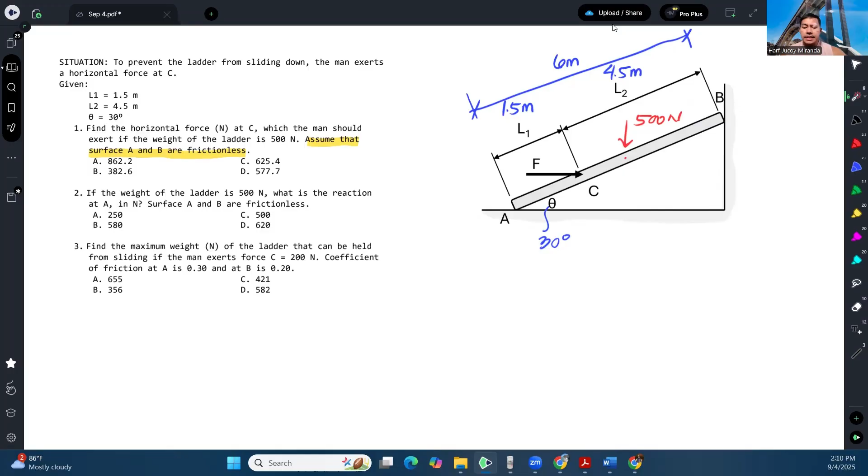And also, according to item 1, assume that surface A and B are frictionless. So meaning this is frictionless and also this one. So let's put reactions on the ladder. Basically, let's draw the free body diagram of the ladder.

Okay, so we will have a normal reaction here, and we will have another normal reaction here. Reminder, when we say normal reaction, from the word normal, it means it is perpendicular to the surface of contact. So we know that the reaction here would be vertical because the surface of contact is horizontal. Here, we know the normal force is horizontal because the surface of contact is vertical. It's always perpendicular to that surface. So that's it, those are all the forces acting on the ladder.

So let's solve for what's needed. We are asked to solve for the horizontal force F. So to solve for F, let me first put in the measurements. First of all, this distance can be calculated. And that distance is basically 1.5 sine of the given angle.

Why? Because if you look at this triangle, it turns out this is 30 degrees and this is 1.5. So it turns out the 1.5 is the hypotenuse. That's why this is 1.5 sine of 30 degrees.

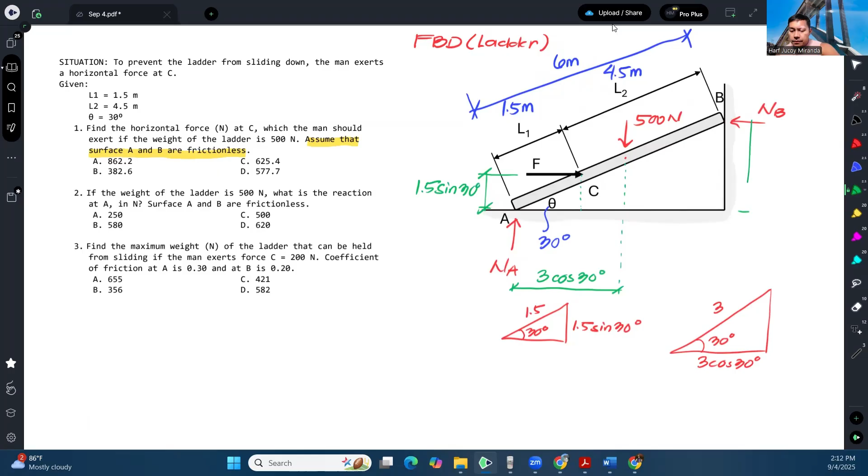And then lastly, this can be defined as 6 meters times sine of 30. So once again, if we consider this triangle, it's obvious, this is the 6, so this is the 30, therefore this is opposite, so it's 6 sine 30.

Okay, so the reason I did that is because I want to take the summation of moment at A, in order to get or create an equation. We could take moments anywhere, but preferably at A or B since those forces are also unknown.

So let me take the summation of moment about point A, assuming counterclockwise is positive. Starting off with F, the moment arm is 1.5 sine of 30, and the rotation is clockwise. And then we have the weight, whose rotation is also clockwise. Its moment arm is this.

Okay, and lastly, the one that rotates there is the normal reaction at B, whose rotation is counterclockwise. So plus NB times 6 sine of 30, and that is all equal to 0. For now, that is our equation.

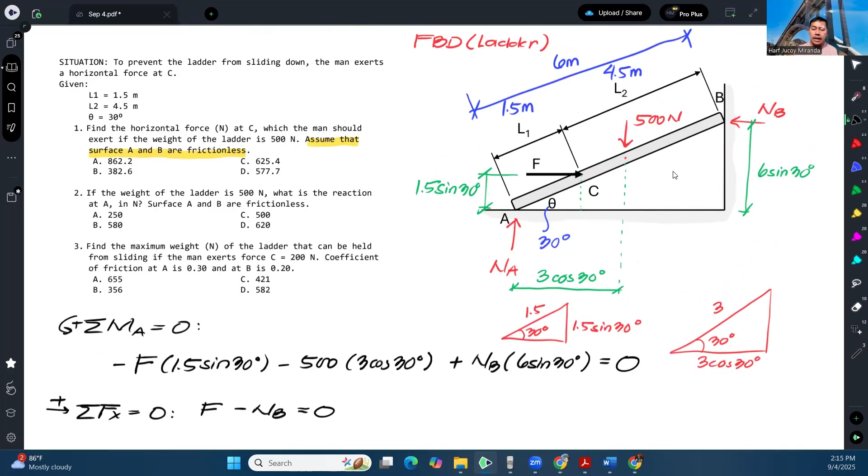Okay, so I'll assume to the right is positive. So we have F to the right and then NB to the left. Those are the only forces acting horizontally, there are no others. So therefore, we can say that NB is actually equal to F, and with that, we can substitute NB here.

So pwede natin to palitan ng F. And from there, we can solve for F. Okay, so solving for F.

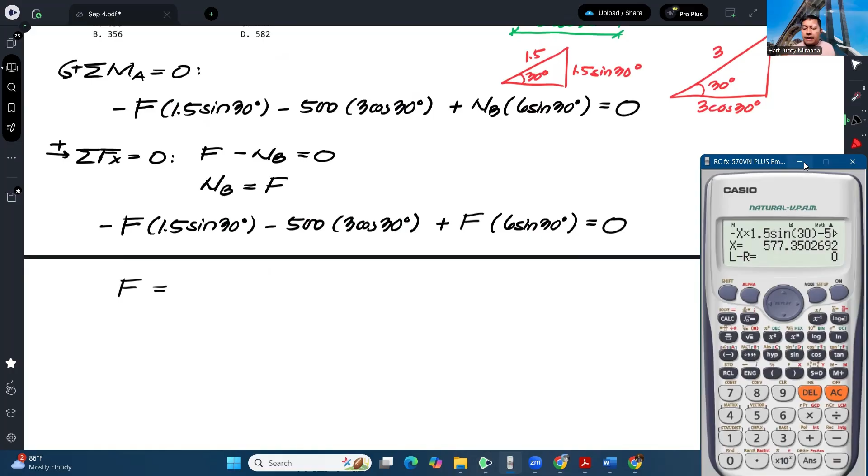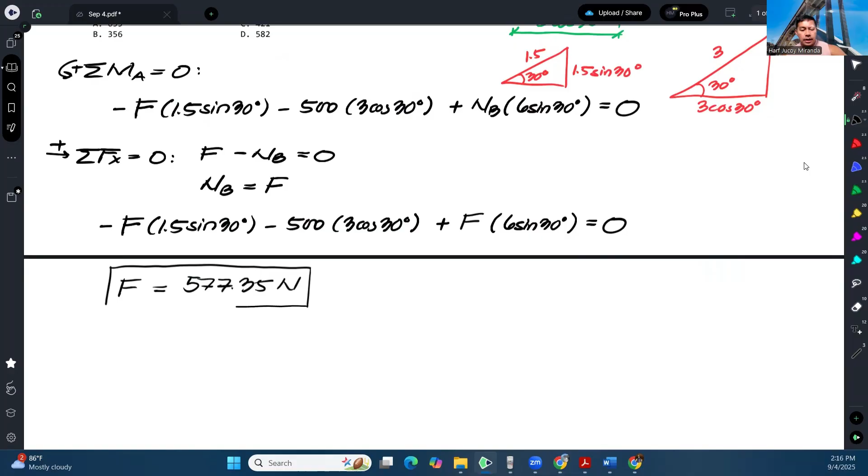So that gives us 577.35 newtons. So that is the required force that needs to be exerted to the ladder to maintain equilibrium. So our answer here would be letter D.

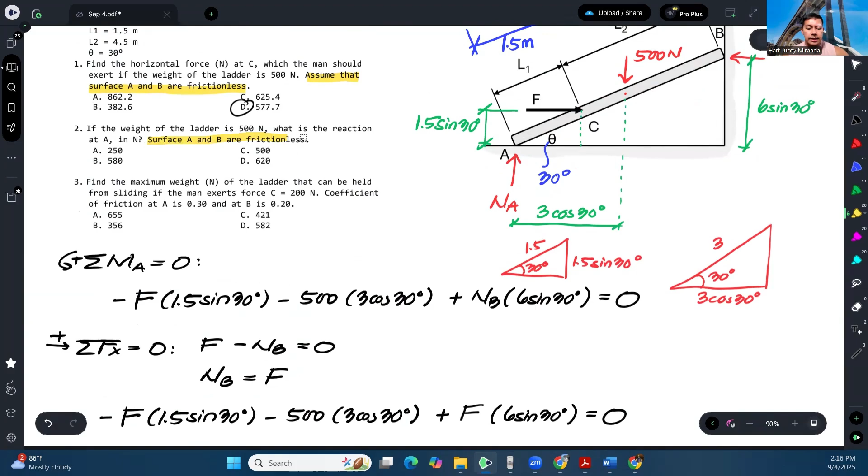Next, if the weight of the ladder is 500 newtons, what is the reaction at A? And again, surfaces A and B are frictionless. So ito pa rin yung free body diagram natin. So to solve for NA, basically, gagawin mo lang summation of forces Y and kitang-kita kagad.

This for number 1, this for number 2. If you take summation of forces Y equal to 0, assuming upward positive, kitang-kita kagad na NA is equal to 500. Kasi wala namang ibang force acting on the Y.

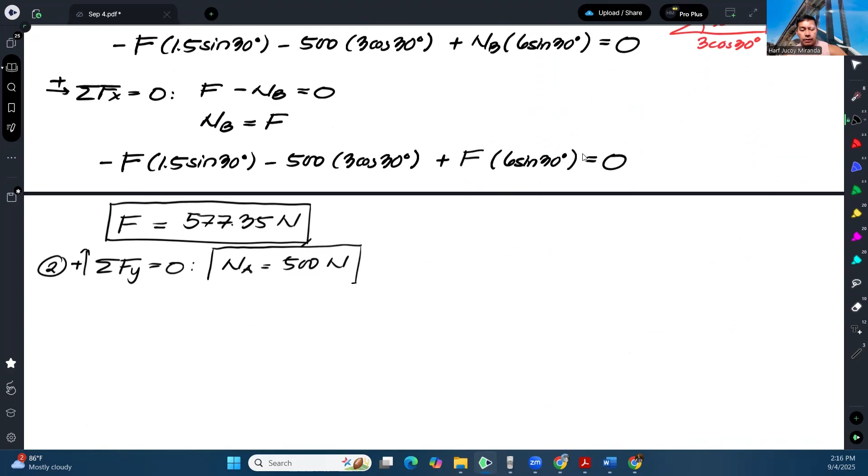So therefore, our answer here would be letter C.

Okay, lastly, number 3, find the maximum weight of the ladder that can be held from sliding if the man exerts a force of 200 newtons and the coefficient of friction at A is 0.3 and at B is 0.2. So this time, meron ng friction, no? So let me redraw the free body diagram for the ladder.

Okay, so once again, merong weight, pero unknown na siya. And ito ang known, this is 200 newtons. Tapos, this time, merong normal reaction pa rin sa A at saka merong normal reaction sa B.

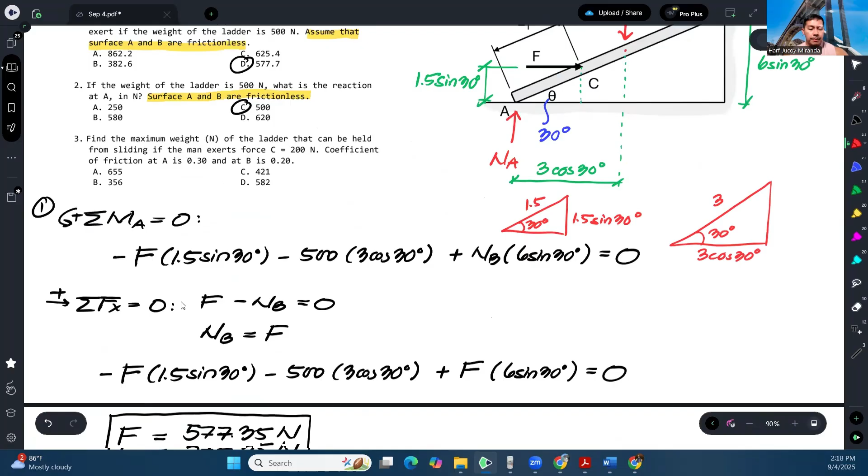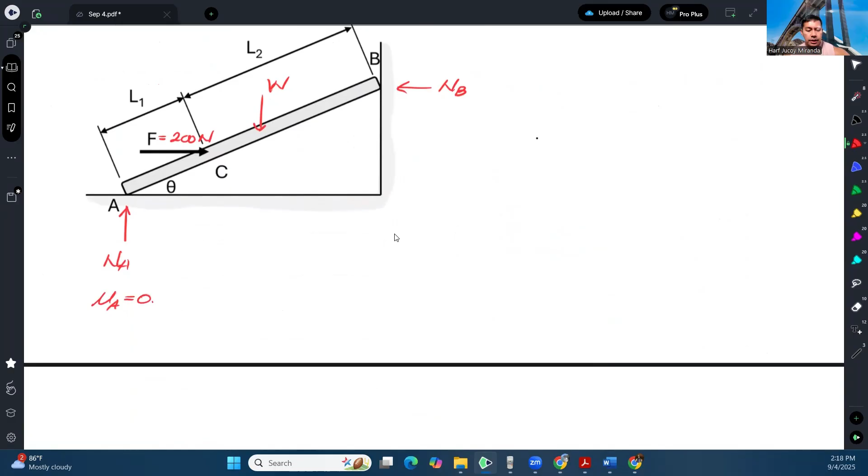Pero meron ng friction, no? At according to problem number 3, yung sa A daw, ang coefficient of friction is 0.3 at sa B naman ay 0.2. So mu sub A is 0.3, tapos yung mu sub B ay 0.2.

Okay, so ngayon, ang friction natin, tandaan natin, ang friction is always parallel to the surface of contact. Kung ang normal force ay laging perpendicular sa surface of contact, ang friction force naman ay laging parallel. So kung ito yung surface of contact, dyan papunta yung friction.

Ngayon, ang tanong, ano yung direction ng friction?

To emphasize this, dati sa ibang mga supports, like roller support, hinge support, fixed support, merong mga reactive forces, di ba? Ibig sabihin, merong mga reactions. At sa mga ganong klaseng support, it is okay for us to assume the direction of the reactive force. Okay, that is okay. To assume kasi later on malalaman lang natin na yung assumption natin ay tama kung positive yung na-solve natin, and negative naman, ibig sabihin mali yung direction na inassume natin.

At ang gagawin lang natin is babaliktarin natin yung assumption, di ba? So ganun lang kasimple, kapag ganong klaseng support yung meron tayo. Kaya lang ibahin po natin yung rough surfaces, yung mga surfaces na merong friction.

So guys, dito, hindi po tayo pwedeng mag-assume basta-basta ng direction ng friction. It is important for us to understand what would be the impending motion. Kasi kapag nagkamali tayo ng assume ng direction ng friction sa mga rough surfaces, it is highly possible that our calculated value will be wrong. So hindi siya kagaya ng mga support reaction na pagka nagkamali ka ng assume, magne-negative lang. Dito hindi. Kaya importanteng malaman ano ba ang tamang direksyon ng impending motion.

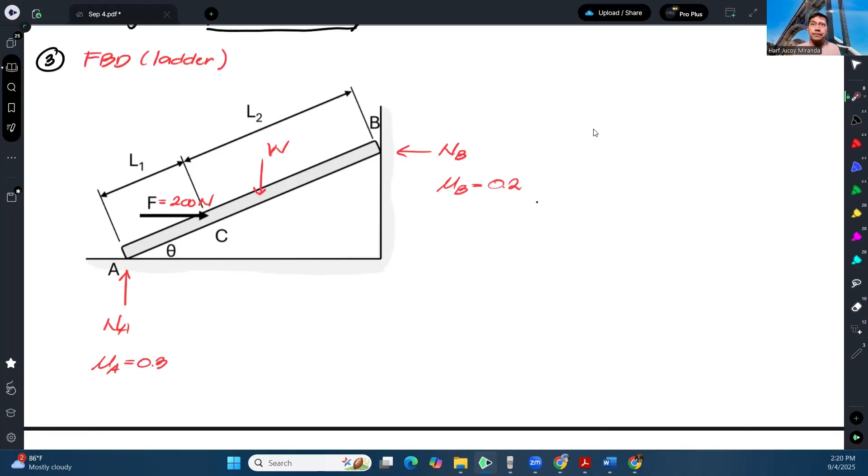So sa case na to, ang tinatanong sa atin ay maximum weight. Ano daw yung maximum weight? Pinakamabigat. Ano yung pinakamabigat na pwede si ladder, na maging bigat ni ladder para kahit na sinuportahan natin ng 200 newtons to, ay hindi pa rin siya magi-slide?

Hindi pa rin siya magi-slide, or ano ba yung sinasabi nating pag-slide? Ibig sabihin ba yung ladder lilipad doon? Hindi naman, no? So ibig sabihin ba yung ladder parang bababa dito? So I think that's better, that's the correct impending motion.

In order for us to know kung ano yung proper na direction ng friction, ang una mo dapat alamin is ano ba yung impending motion. Ano ba yung ine-expect natin na paggalaw nung object in the absence of friction.

Okay, so kunwari, walang friction dyan. Ano ba ang imagine natin na pwedeng paggalaw yan? I think isa lang naman. Babagsak na naman yan dito, no? So, ibig sabihin, kung mag-focus tayo sa surface of contact na to, para mangyayari, ang impending motion niya, pababa.

Tapos kapag mag-focus naman tayo sa surface of contact na to, ang impending motion niya, papunta doon. Di ba? Hindi pa pwedeng papunta dito. Papunta doon, no? So, yun yung impending motion.

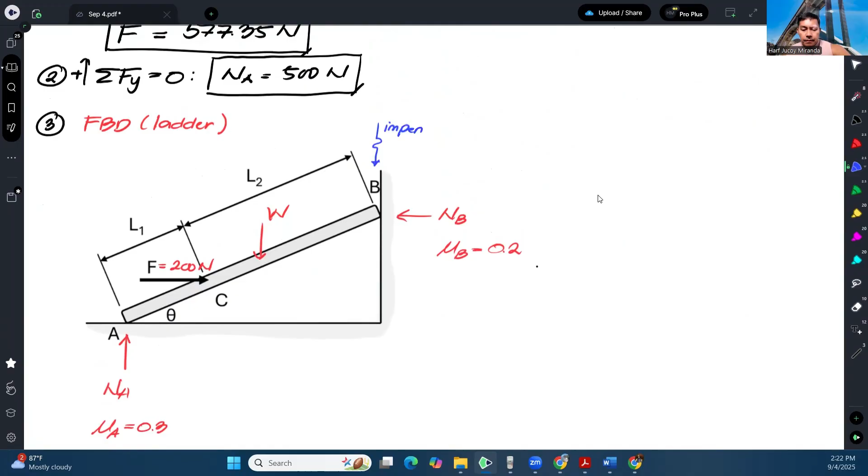So, lagyan natin. Okay, so bali sa point B, ang impending motion natin is ganito. Sa point A, ang impending motion natin is pa ganito. Alright? So dahil doon, na-define na natin.

So dapat yung friction opposite doon sa impending motion. So sa point A, dapat yung friction natin papunta dito. Tapos sa point B, ganito. Ayan, so yun nga yung correct na direction ng friction. At importanteng ma-identify yun sa umpisa. Pag nagkamali ka kasi ng identify doon, mamamali na yung sagot mo.

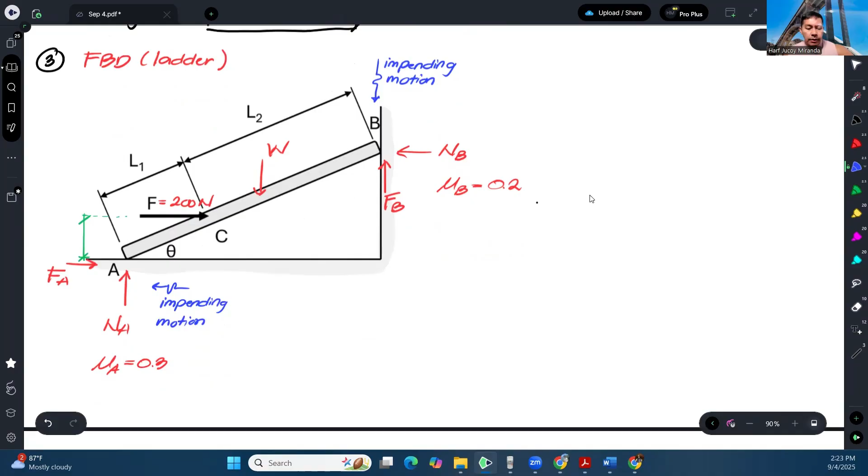Okay, so now, let's create equations para ma-solve ito. So unahin ko ulit lagyan ng mga measurements. Hindi ko na ulit ipapaliwanag, ano? Pero yung measurement dito kanina was, bali ito ay 1.5, ito ay 4.5, tapos ito ay 6.

Okay? So, ibig sabihin ito ay 1.5 sine of 30 degrees.

Okay, and then from earlier this was 3 cosine of 30. And then lastly, this one, this is 6 sine of 30. So there's one more.

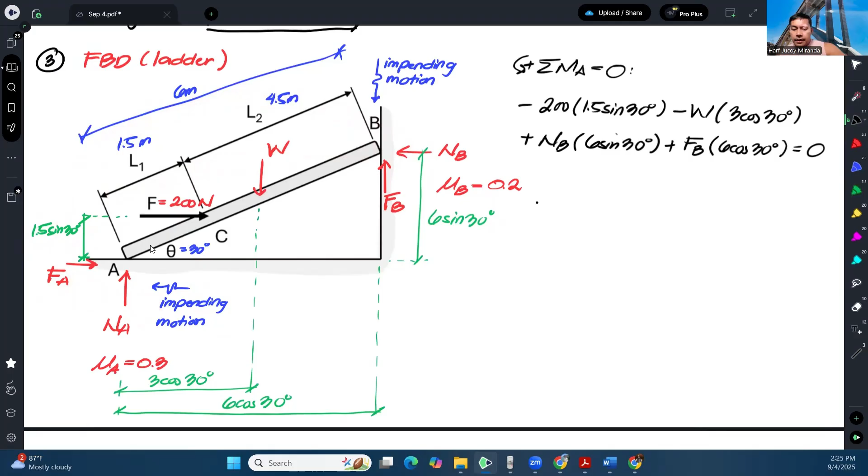Now, to minimize the unknowns, we have to create other relationships. First is the friction. The limiting or maximum friction is given by mu times N. That's the biggest friction that can be produced on these surfaces. So it's a function of the coefficient of friction and the normal reaction. So that means, once we reach that, we're at the boundary where it will start to move or slide.

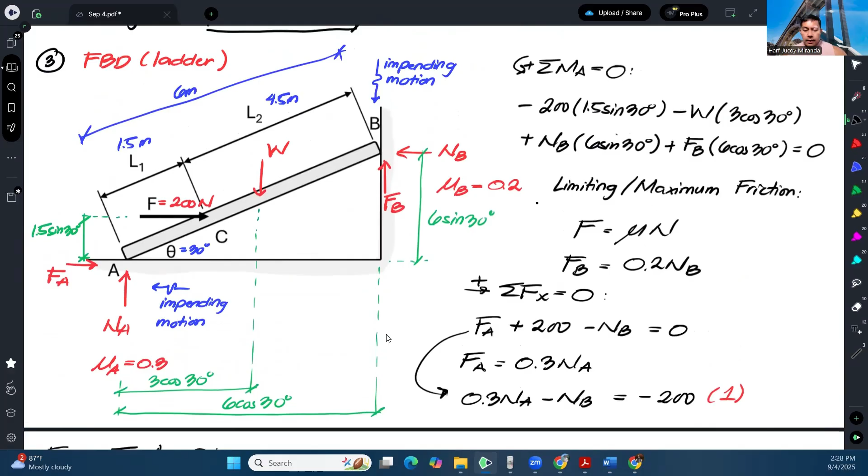So now we have one equation. Let's fix this one too, and replace it here with 0.2 of NB. Now down here, from summation of moment at A equal to 0, we will have NB, let me keep NB first, NB times 6 sine 30, plus FB which is 0.2 NB, times 6 cosine 30.

Minus W, 3 cosine 30. Then I'll transpose this part, the negative 200, to the other side. So it becomes positive. Let's move that.

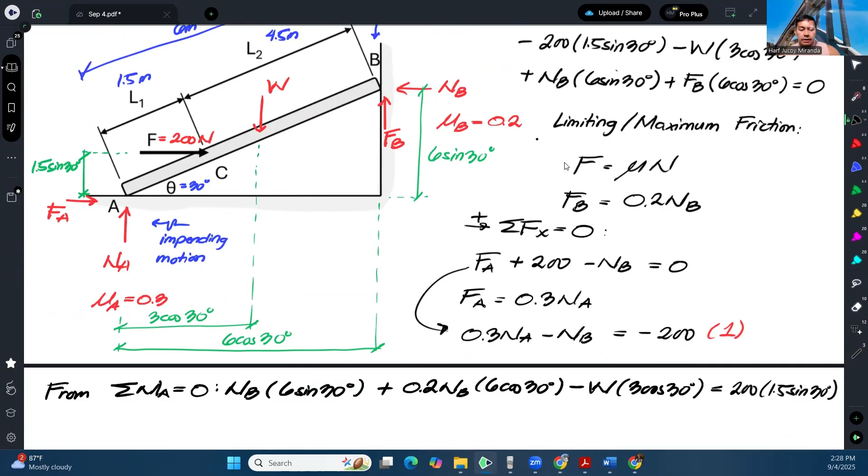So it becomes 200 times 1.5 sine 30. Let me call this... actually we can combine this, since it's just NB. So we can say NB times 6 sine 30 plus 0.2 times 6 cosine 30, minus W, 3 cosine 30, equals 200 times 1.5 sine of 30.

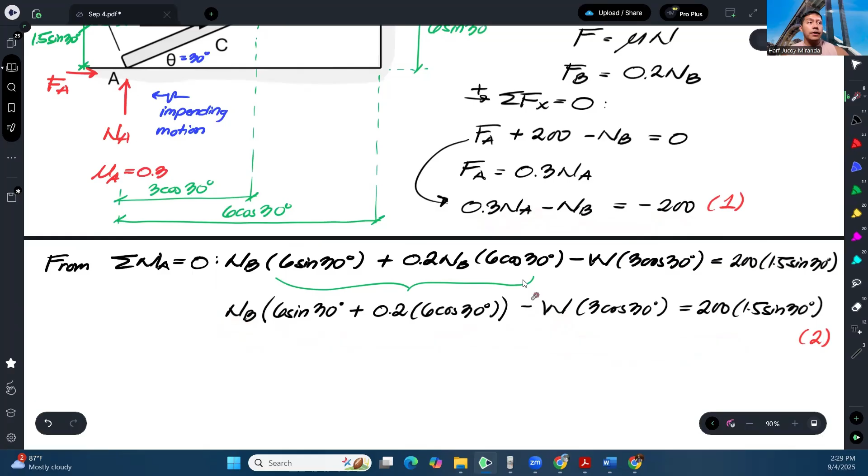So we will now proceed with summation of forces. What haven't we done yet? Y. Okay, so assuming upward positive, for summation of forces Y, we have NA upward.

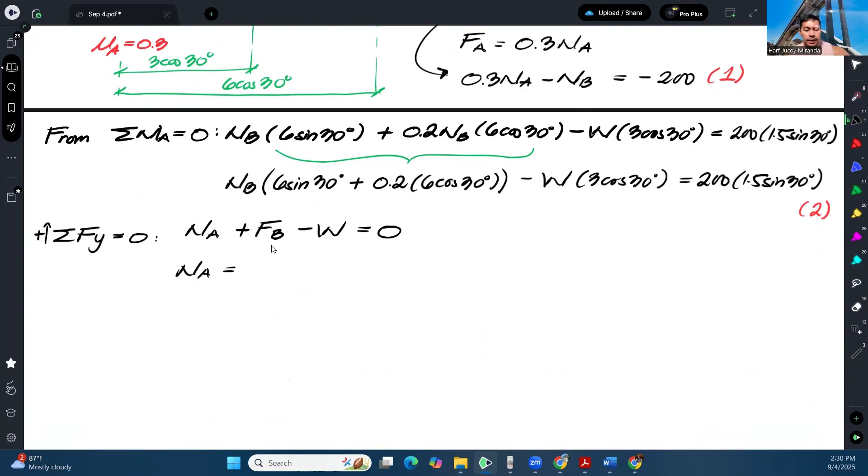Then we have FB, also upward. And then we have W, which is downward, so minus W. And again, we'll replace FB with... minus W equals 0. So that's what I replaced, guys, this one. Oh, sorry, 0.2, not 0.3, it's 0.2.

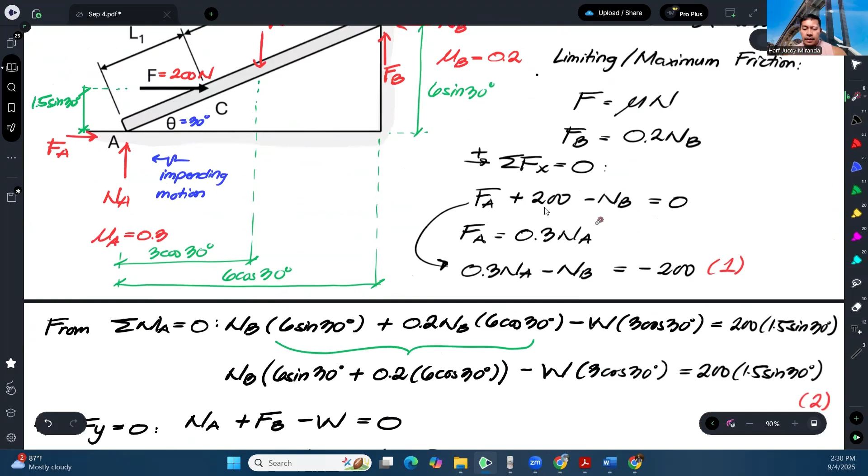Okay, and I can call this equation number 3. As you can see, our three equations are all linear, so we can solve all of them using the equation mode on the calculator.

Okay, that's why. Oh right, this should be plus. Let me redo the computation. Basically, it's just the sign in our computation. So in equation 3, this should be 0.2. There, 359 and 420.73.

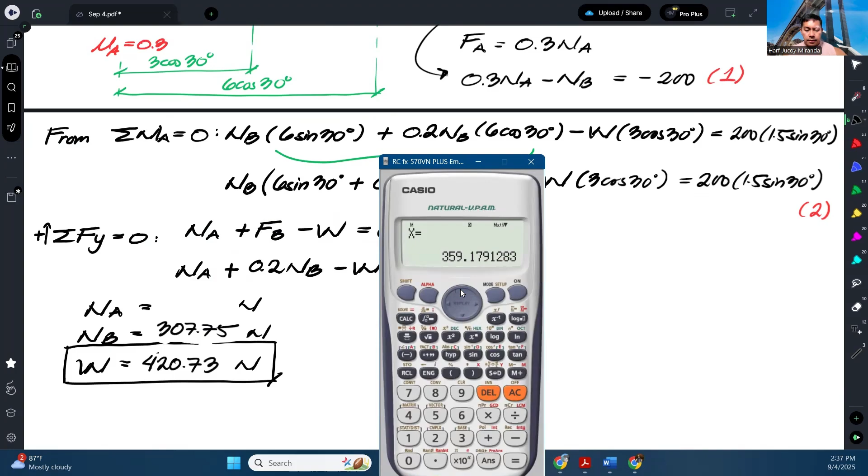Okay, so 307.75 is NB, and 359.18. Okay, so that's correct. So our answer is, oh yeah, letter C, 421 newtons.

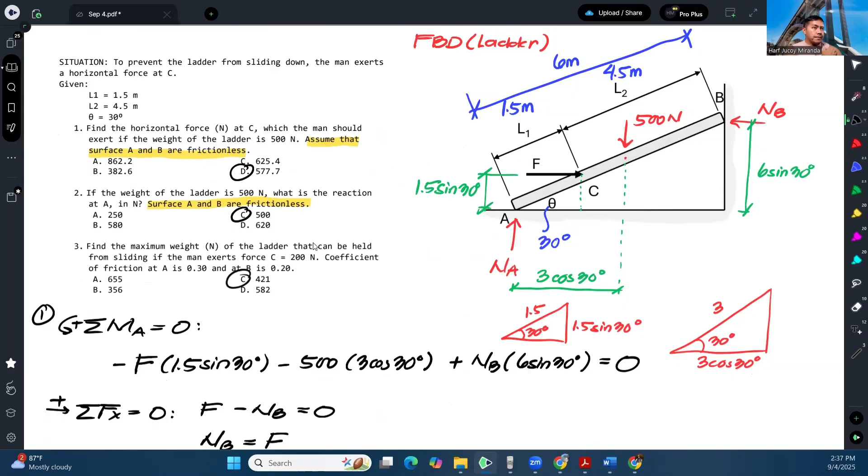And that's how we solve this problem.